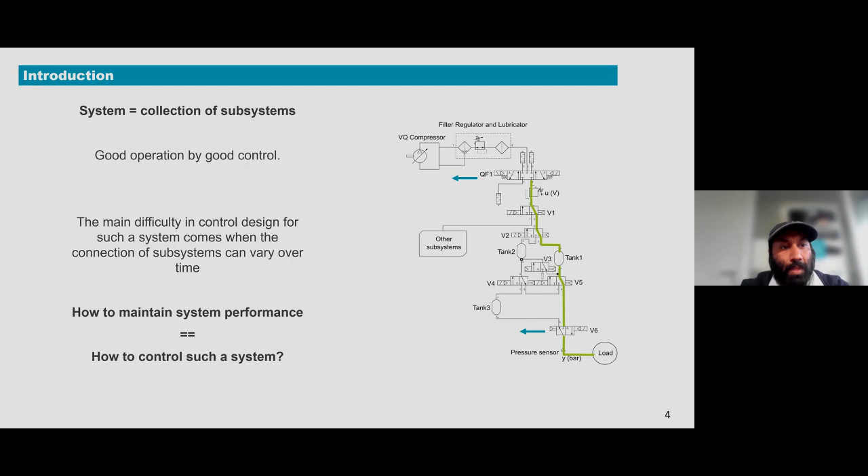I'm going to start with the introduction, or basically I'll talk about systems with variable topology. When we say system, we actually mean a collection of subsystems or subcomponents. And of course, by good control, we mean that they should operate in a good way. We'll talk about this topology in general at a later stage.

But the main difficulty in control design for such a system that consists of subsystems is when the connection of subsystems can vary over time. The main question that arises is how can we maintain the system performance even though there are changes in the connections of these subsystems, or rather how to control such a system.

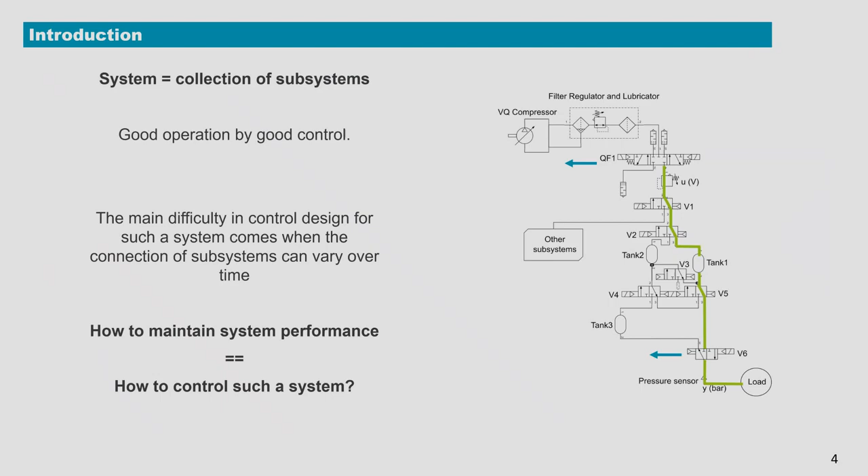So in a nutshell, where does this fit in at Flanders Make? We often work in dedicated modeling and identification for control. Some of the challenges that industry poses is how to control systems with variable topologies.

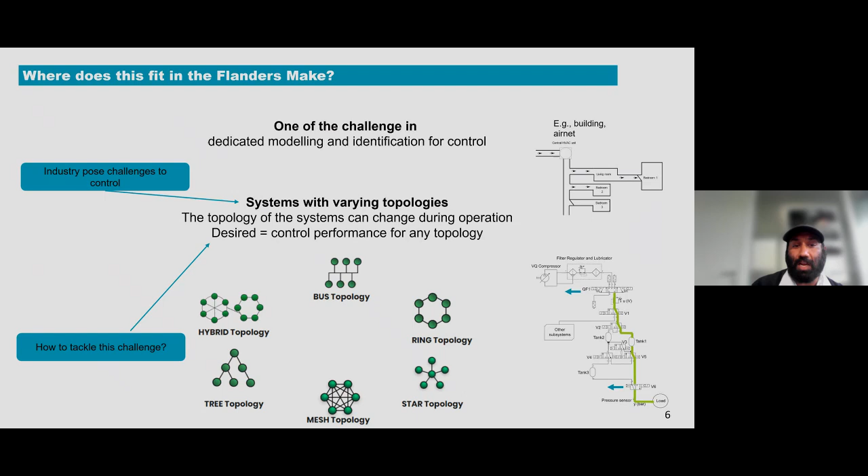You might have heard this word topology in different engineering aspects, like bus topology, which is quite common, tree topology, mesh topology, and so on. But I'll go more in detail about what we mean when we say systems with variable topology. In finalizing this, we want to show how we tackle this challenge of controlling systems with variable topologies.

Like I said, a system can consist of different subsystems, and they can form a network in such a way. There are subsystems, like you can see in this figure. There are some subsystems, they can communicate with each other, and there are many subsystems. A good operation would be if it has good control when the topology or the connections between these subsystems change.

A good example is a microgrid, where you will see that at some point there might be some houses connected, some batteries, some EV chargers connected. What you want to do is actually balance the load, and in such a way you balance the state of power and state of charge.

It might happen that most of the time these things might not be connected. So what I mean is the topology actually changes, and you would still be able to meet the supply and demand by balancing this state of power and state of charge.

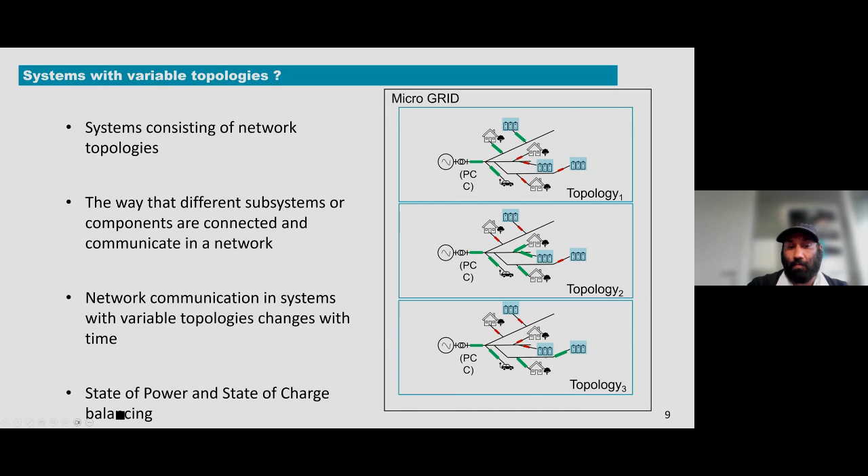Another good example is a central HVAC unit in a building. Let's say you have different rooms, like a living room and a bedroom. It might happen that you want to heat one living room or all of them. And suppose you have a door connected between two rooms, like in this third figure, it might happen that you have to open and close the door. In this way, the dynamics or heating of these rooms will change, and the main goal here is temperature balancing.

Another example is an air net, basically a pneumatic system. You have compressors, you have a filter regulator and lubricator, and then you actually have pressure and flow, basically controlling the load or meeting the demand.

It might happen that, for example, a valve V2 can change direction, and during this change in direction, you change the topology inside the system. You can see the difference between these two figures is the direction or flow of the green line. The main goal here is to control the system, or rather balance the pressure. I'll talk more about these components because this is where we actually validate our examples or validate our algorithms to control systems with variable topologies.

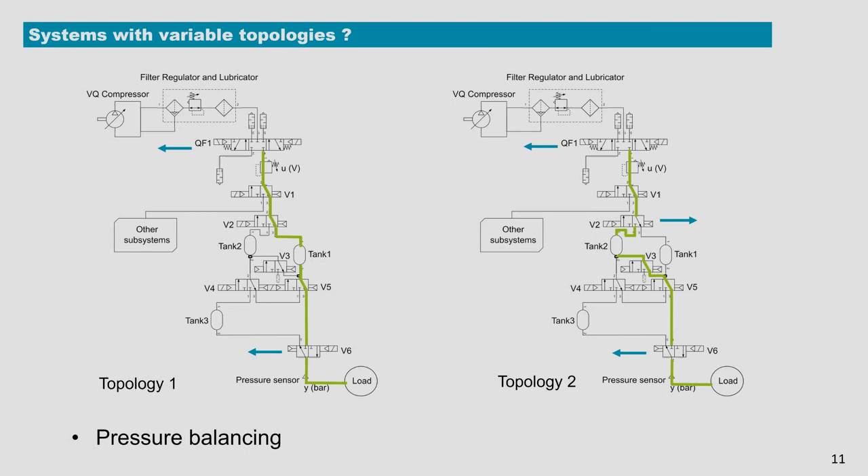So what's the main challenge here? Like I said, an example over here, just a building with central HVAC unit. Now, if the number of rooms, or rather the number of subsystems or components, increases, there will be an increase in the number of topologies and combinations, because it might be possible to just heat one room or all of these rooms, and the number of topologies increases exponentially with the number of subsystems.

So when you actually want to design a controller for this whole system, you will have an increase in the number of model identifications needed. And why is that? Because not all combinations will have the same dynamics. What I mean is heating one room will not be the same as heating all the rooms. What we actually want to do is reduce this effort. If you reduce this effort, you reduce the control design and development complexity itself. That's the main challenge we'll be trying to tackle here.

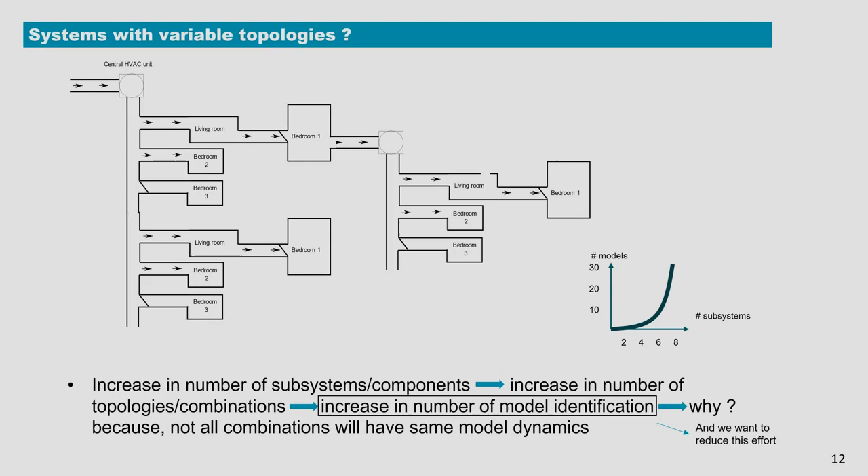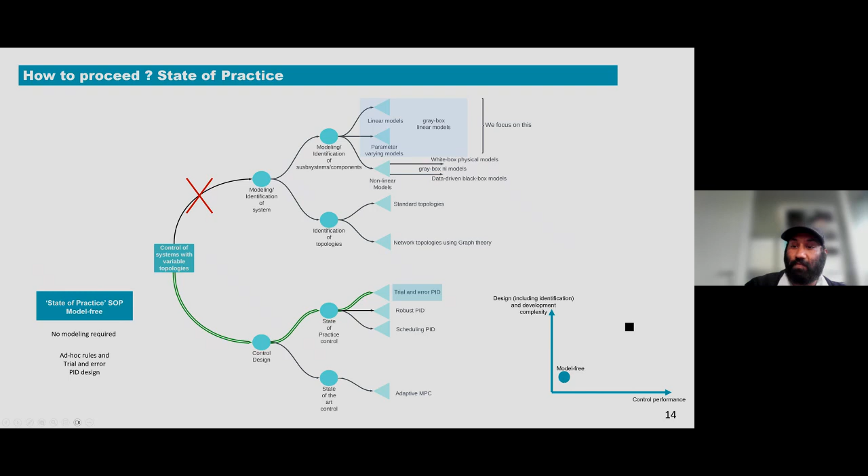So usually when we want to start controlling systems with variable topologies, we follow a general flow. The most classical way of controlling these subsystems is to go for state-of-practice controllers, which are basically model-free controllers. You don't have to model anything, just try ad hoc PID controllers designed with trial and error. Of course, you do not consider the model, so you don't have to spend much time modeling or identifying the system or subsystems. This is easier in a way that you don't have to spend much effort, but at the same time your control performance might not be good. You can argue that you can spend more time doing more trial and error, but then this blue dot will actually see diminishing returns, decreasing exponentially.

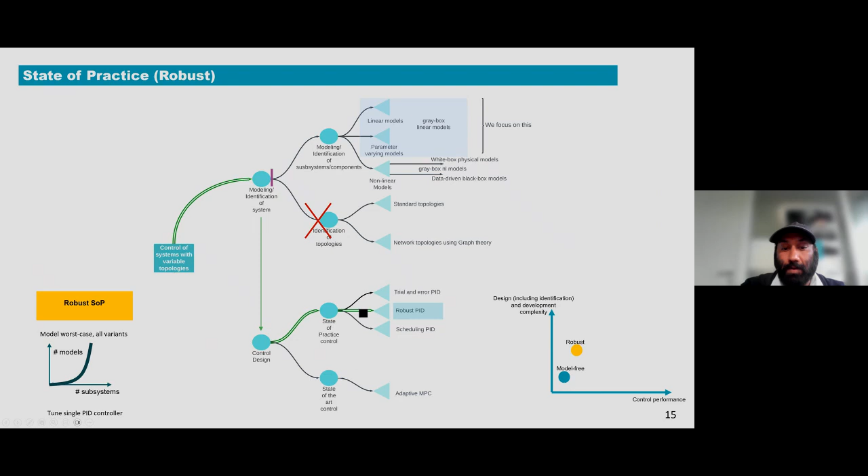One way is to actually consider the modeling part as well and try to model all combinations. So identify all the combinations, identify the dynamics of all combinations, and then start control design, but considering the worst case scenario. The drawback is you have to go through this exponential curve, performing identification procedures exponentially with respect to the number of subsystems, which increases the complexity of designing and development. But at the same time, you will see an increase in control performance because this controller will take care of, or be based on, the worst case scenario.

A good strategy would be to actually design a scheduling controller. Basically, you model all the subsystems, dynamics, or combinations, and then you design controllers for all combinations. Of course, the effort will increase even more because now you're designing the controllers as well with respect to the different subsystems or topologies. There you will see control performance increasing, but at the expense of spending a lot of effort in designing and developing the control system for variable topologies.

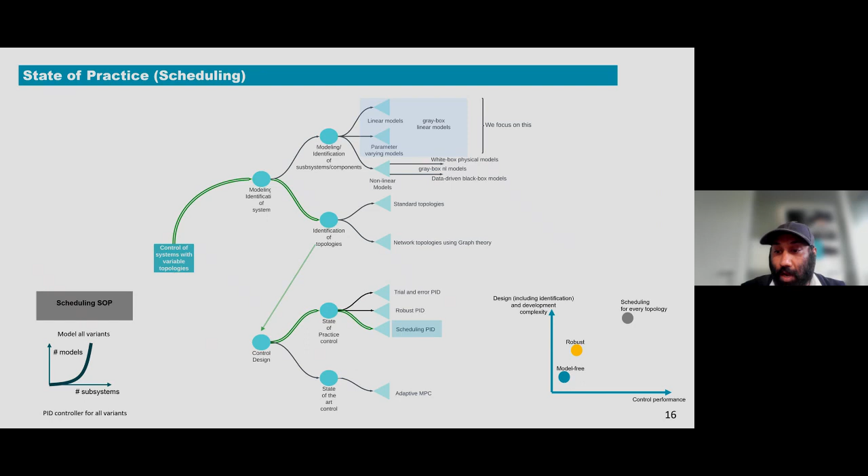So the goal is rather simple: how to get to where you don't have less performance, but a better performance, while also not having to spend a lot of time in designing and developing the controllers for the system with variable topology. Or if you want to break it down, you want to minimize the control design and development complexity and maximize the control performance. That's how we will show you here how we proceeded, or how our tools helped us achieve this.

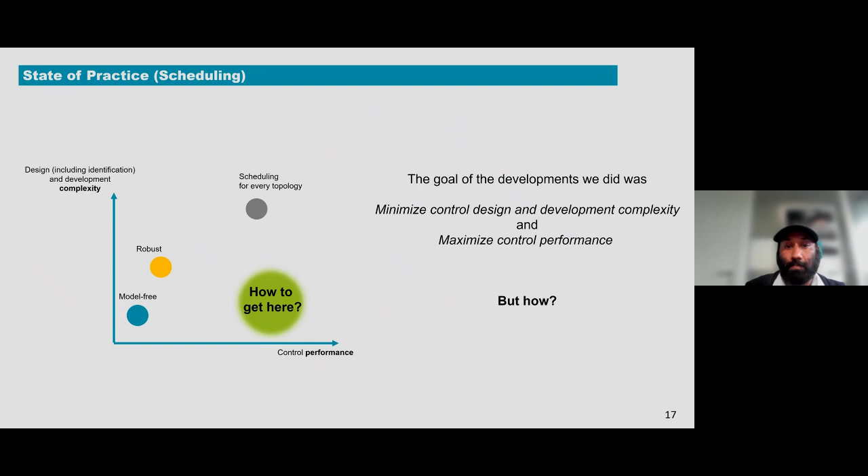For that, we went for state-of-the-art adaptive model predictive control, where what we actually do is design a model predictive controller. The key advantage is you only have to model the subsystems and not all the combinations, but you identify the topologies in such a way and make your controller adaptive to these topologies, hence the name adaptive model predictive control. Because of this linear curve, where you only have to model subsystems and not all topologies, you reduce the effort and increase control performance. This is what I'll show you by the end of this presentation.

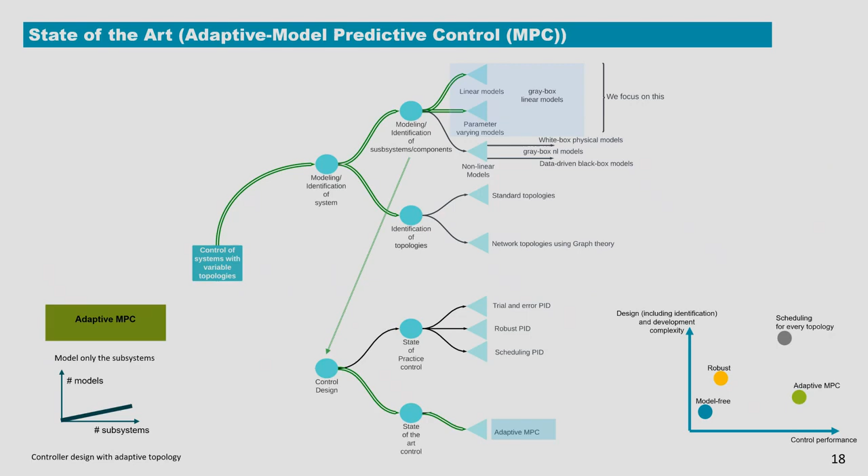This is also the key takeaway of this webinar. So we spent effort researching these topics, comparing certain approaches, and we found out that we will actually achieve this green dot over here: increasing control performance while reducing design and development complexity.

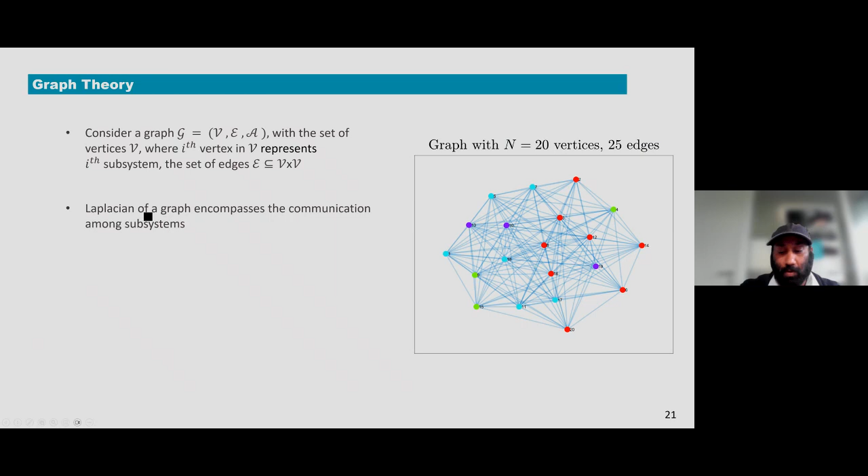I've been talking about variable topologies quite a lot, but how do we obtain these topologies? You'll remember this figure from the previous slides. If you have subsystems connected with each other, consider these subsystems as vertices and the communication as edges. You can map your whole system using graph theory. The key result is a Laplacian, which encompasses the communication among these subsystems. This is the base for our method, where you can boil down any type of network into a simple matrix known as the Laplacian.

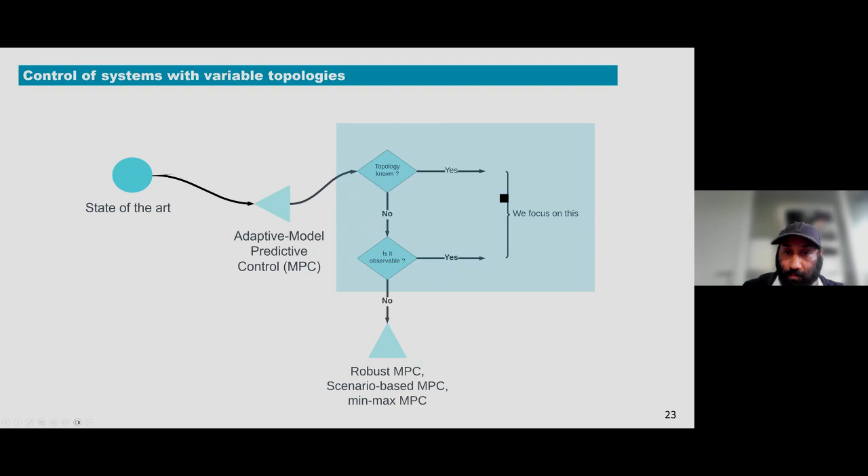So how do we control these subsystems with variable topologies? We had to make some assumptions. We assume that we know the topology. If we don't know it, we might be able to observe it on the fly. This is quite useful by monitoring, for example in a building, which door is closed or open, or in a pneumatic system, which valves are open or switched on and off. But if that's not the case, I would point you to robust MPC or scenario-based MPC. This is out of scope for our research and this webinar. We'll focus on the part where we can observe the topology on the fly, or in real time.

Methodology is rather simple. You model and identify each subsystem like I said before, so your complexity is not exponential anymore, it's just linear with the number of subsystems you model and identify. You define the topology using the Laplacian, or graph theory. Once you do that, you formulate your topology in this form and add a virtual leader - I'll come back to the reason for that. Then you formulate the model predictive control optimization problem with an adaptive Laplacian, or adaptive communication between the subsystems, representing variable topologies.

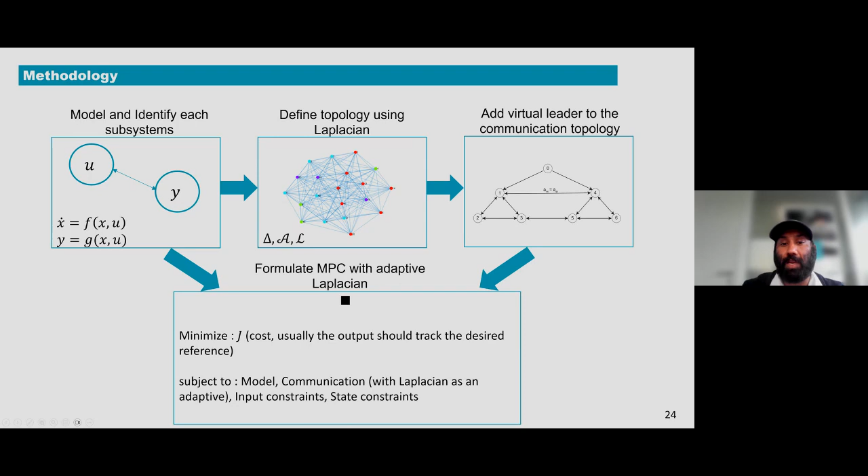So the goal of model predictive control is, at every time sample, to minimize the cost - usually the output that needs to be tracked with the desired reference - subject to the model we identified, the communication between subsystems. So the Laplacian would be an adaptive parameter which can be observed in real time, along with input and state constraints.

We have a pneumatic system in our laboratory, and we validated this methodology, this algorithm, in our pneumatic system.

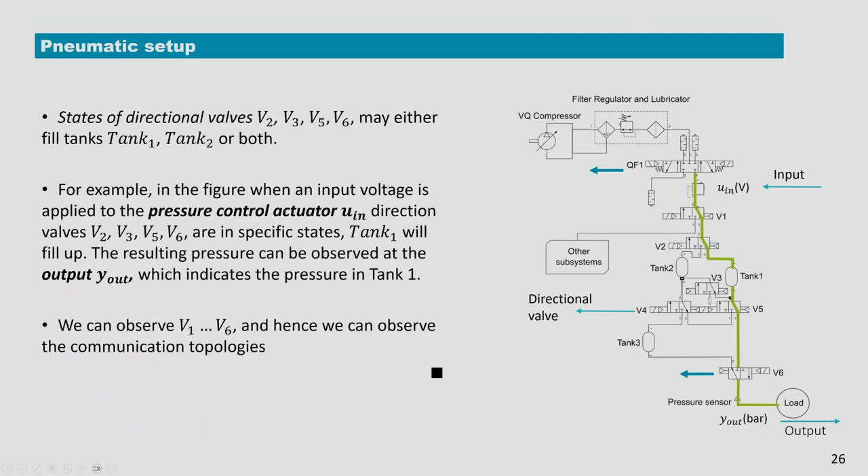In this case, we can observe the valves, and hence we can observe the communication topologies. This also fits the description.

We had to make some assumptions in modeling the pneumatic system, or the subsystems: we consider the ideal gas equation and an adiabatic process. We neglect valve dynamics, assuming they switch so fast that we don't need to account for that.

For the communication, we consider leader and follower communication with a virtual leader. The reason for choosing this virtual leader is we assume there's a delay which can occur due to the tubes in this pneumatic system. The tanks are considered the followers - basically, they are the subsystems. We consider bidirectional communication, meaning each tank can communicate with the other tank, but this can also be extended to one-way communication. The communication has a spanning tree.

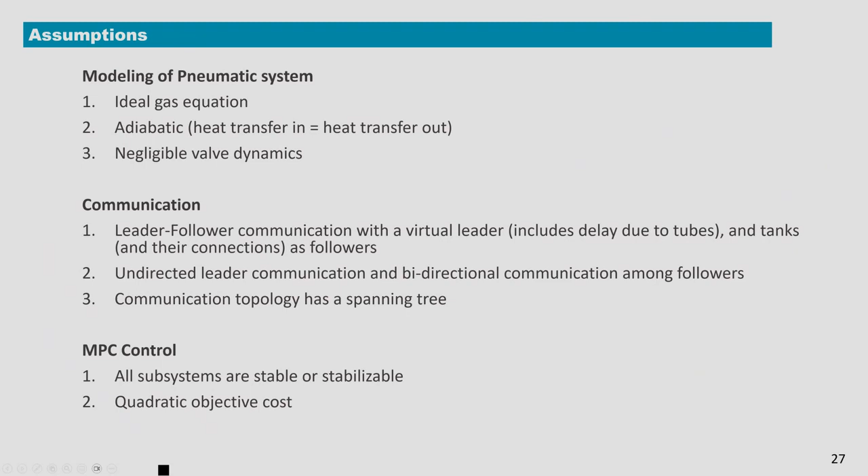For the MPC control, we have to assume that all subsystems are stable or stabilizable, because that's the cost we pay for introducing the Laplacian, or making the algorithm an adaptive MPC control. We assume we have a quadratic objective cost. What this MPC control does is solve an optimization problem at every sample time, and this sample time is usually fast, depending on the dynamics of the system.

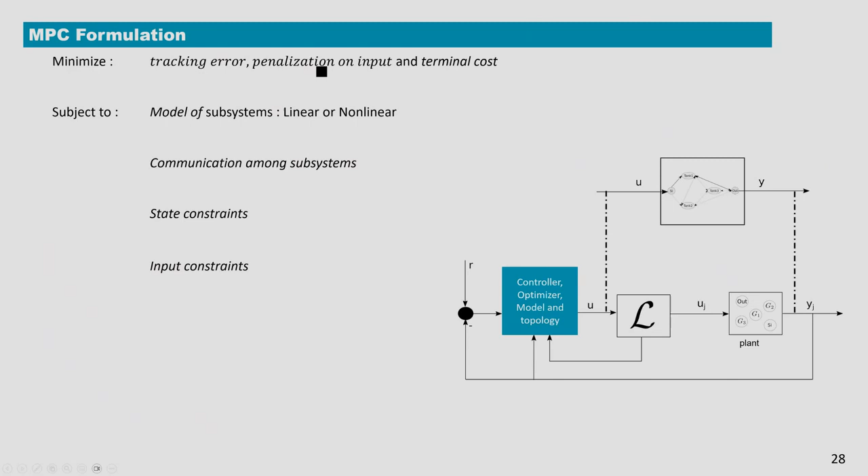So the goal here is basically you have to track a reference, or in our case, provide an output pressure to the load. We also put penalization of input and terminal cost for stability.

Subject to the model of the system, you can choose either linear or non-linear models. The communication among subsystems, using graph theory, you can obtain this big L, which is basically a Laplacian, plus state and input constraints. If you solve this optimization problem every sampling time, you will provide an optimal input that actually achieves the output, no matter how the Laplacian changes or the topology varies.

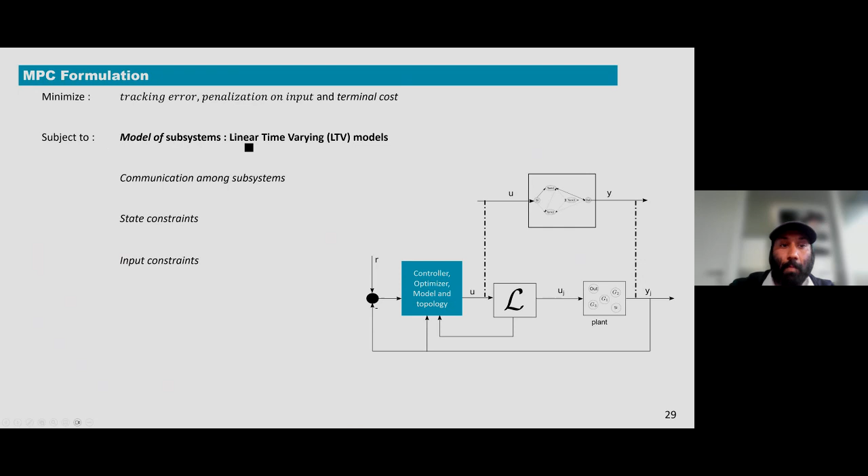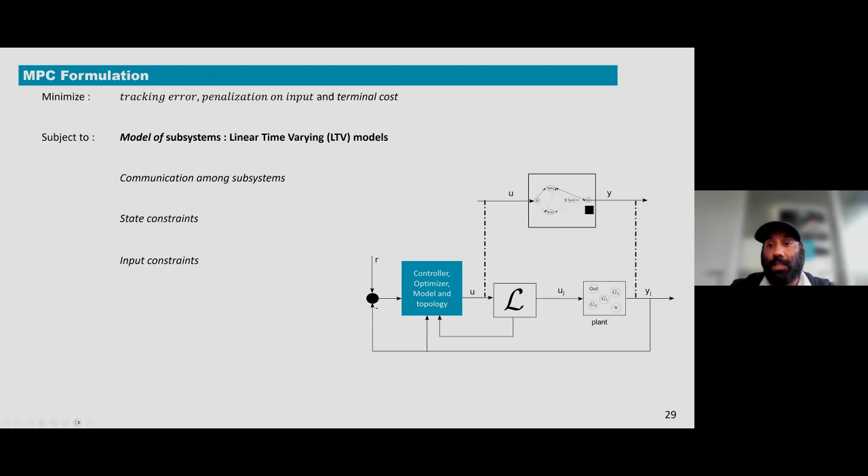For modeling the subsystem, we chose linear time varying models because, as I said, we have tanks, and emptying the tank is not the same as filling the tank. So the dynamics actually depend on the pressure as well. And this is how we moved forward.

I'm just going to go towards the results. But before that, what we did was design an MPC controller which is adaptive, because it considers the observed Laplacian. This means it takes into consideration the variable topology, or this changing communication.

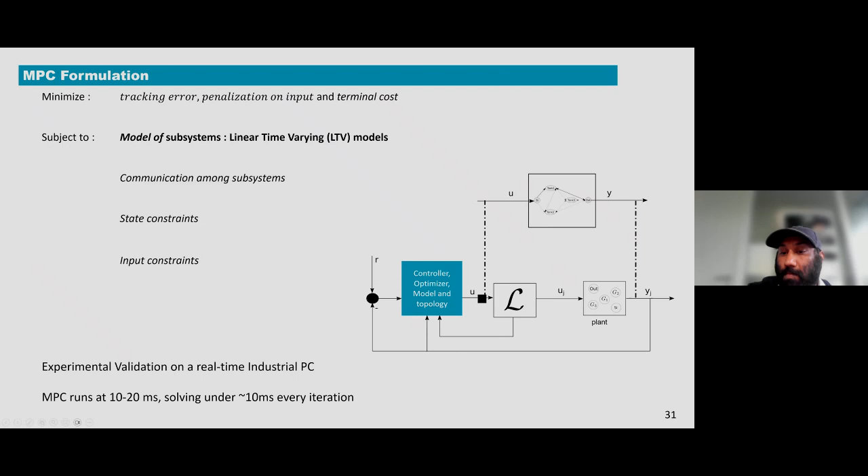We deployed this controller on a real-time industrial PC, and validated it experimentally on a pneumatic system. The optimization runs every 10 or 20 milliseconds depending on the application, and it always solves in under 10 milliseconds. This means it's updating the control input to the system based on the variable topology, and it's fast enough to provide this optimal input coming out of the optimization problem.

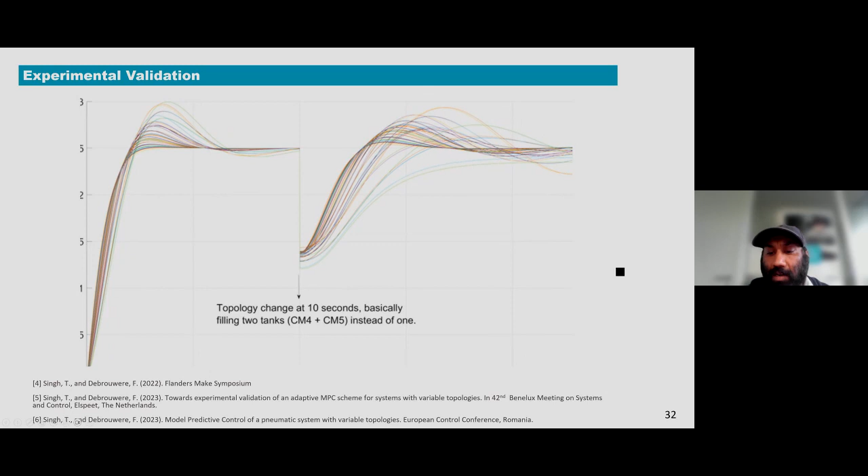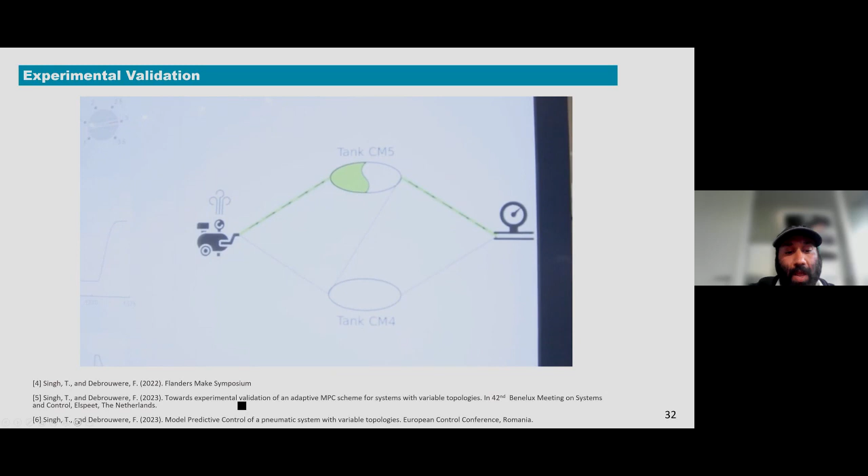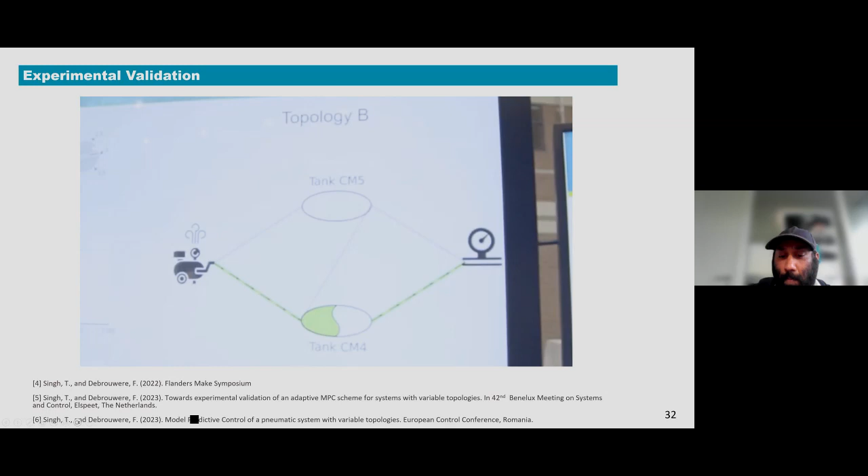So we had quite a lot of results. We did a lot of sensitivity analysis, and validated and compared it with a lot of state of practice controllers. I didn't go into much detail, it's rather high level in theory, so if you want to look into the methodology, we have two publications on this.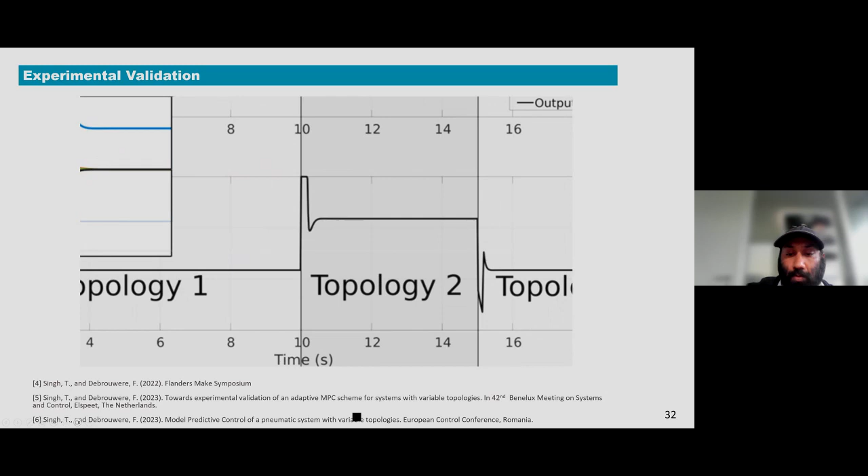Not just that, we also presented a real-time demonstration at the Flanders Make Symposium in 2022. This is basically the results coming from that, what you see is the video from the symposium.

Again, I'm not going to talk about the results in detail, just the key takeaway. We compared our algorithm, the adaptive MPC methodology, with different classical controllers: the state of practice controller, the robust controller for worst case scenario, and the scheduling controller, which switches between controllers when the topology changes.

So let's see how the adaptive MPC compared with a state of practice controller. Since it was tuned ad hoc, it didn't consider the modeling, it was a model-free control design. There was a lot of overshoot when the topology changed, and you can observe this: the ad hoc aggressive PI controller shows a bit of overshoot.

The red part is the overshoot, while the green part is the MPC controller. There was a reduction of overshoot of nearly 100%. Also, the control input, or voltage applied to the valve, had some oscillations once the topology changed, and this was also reduced in the MPC controller, shown in the green curve.

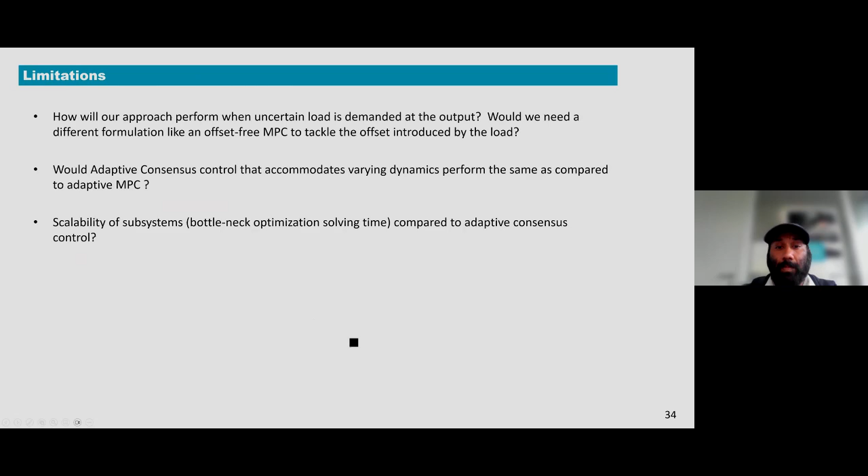That's all from my side. If you have any questions, please don't hesitate to post these questions on the Q&A chat box.

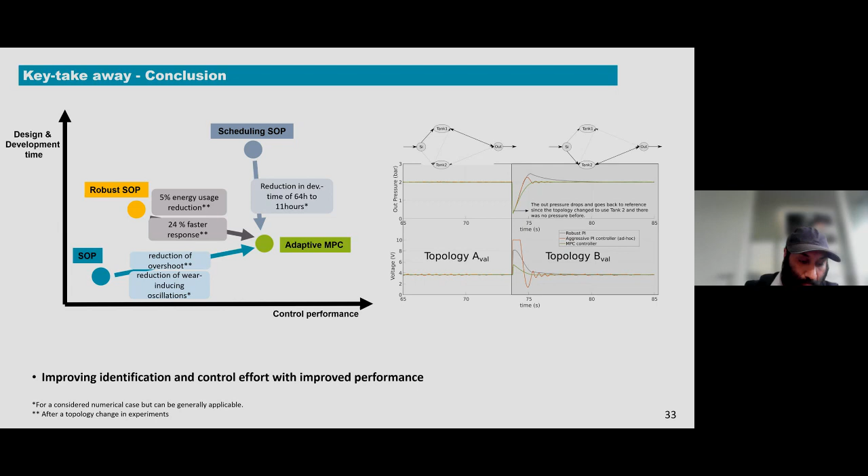Maybe while we wait, I have one question for you. We talked about it already a little bit in the presentation, but can you summarize or give a brief overview of which kind of companies with which kind of applications can benefit the most from using this kind of methodology? So I'll go back to the examples which I showed before.

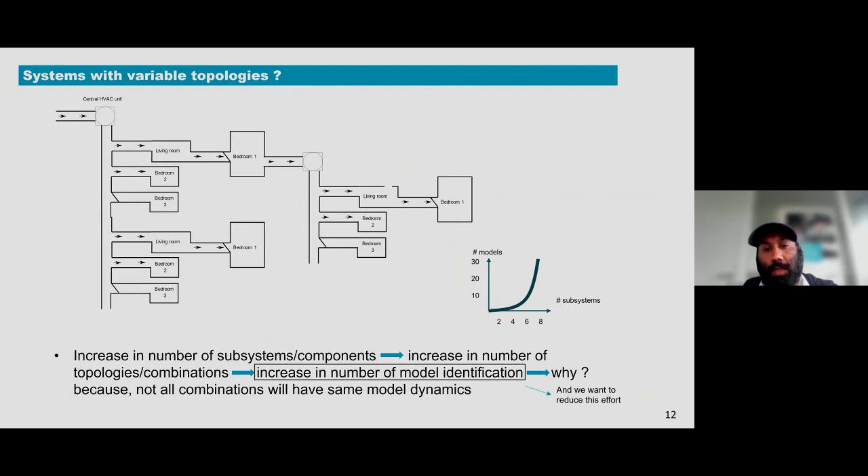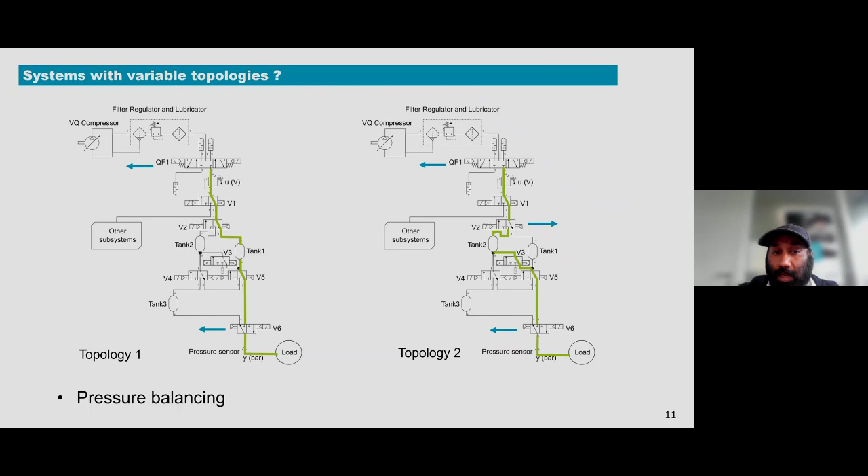So we validated this methodology in a pneumatic system, but this can be useful in AirNet, where you have different topologies coming into account. For example, we have Atlas Copco with AirNets, so this can be useful in those applications. Then we also have temperature balancing, where you have different topologies. One of the companies that has this need to tackle this problem is Duco, where they have different topologies with different combinations possible.

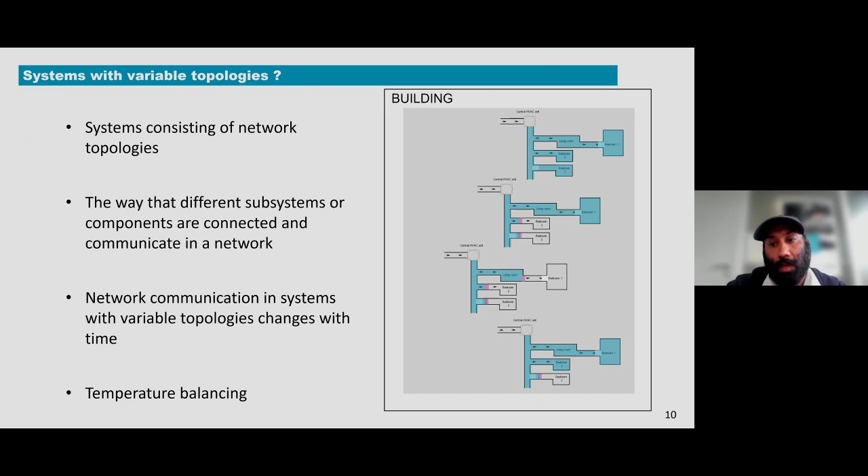Okay. And if there are people listening who might be triggered by this idea, how can they get started with this? What do they need to do, or do you have any idea for that?

So when I said where does this fit in Flanders Make, we actually look into more dedicated modeling and identification for control. So we build the tools that can be useful not just for modeling and identification, but also for control. The tools I mentioned, MPC control, give us the possibility to improve the design and development time, and actually have an adaptive control, like the controller that is able to adapt to variable topologies. So we have certain tools.

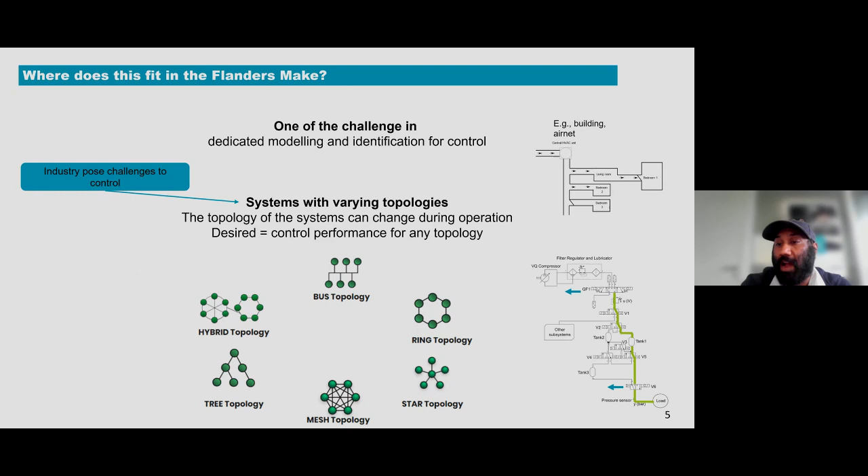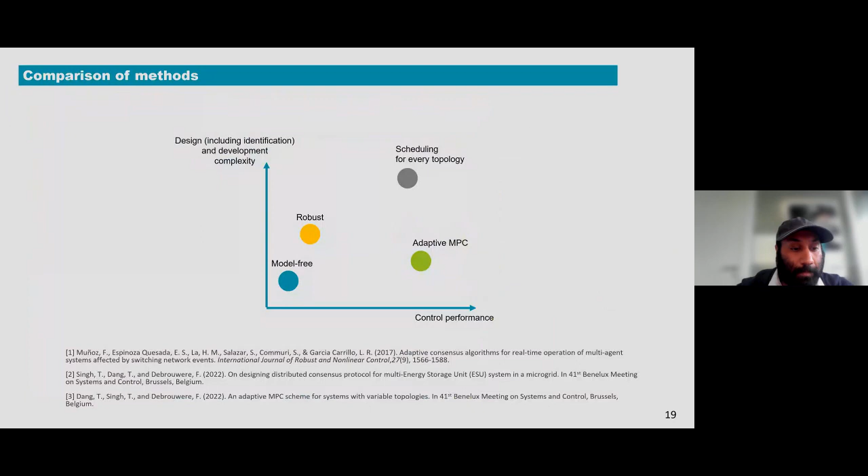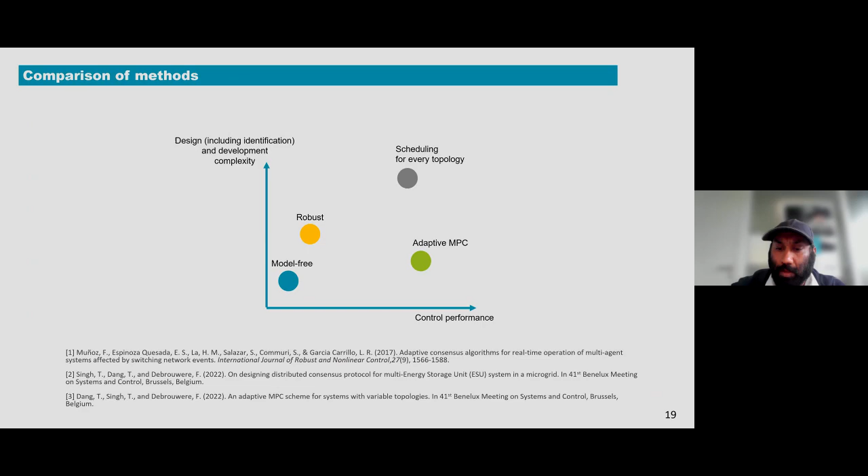If someone really wants to start looking into this, you can look into some references. If someone is interested in the classical controllers, we have certain references here. This is a recorded session, so this will be available already. We also have an overview of a publication, two publications basically. The main one was recently published in the European Control Conference. That will provide you a starting point, or a low level overview of the whole scenario I've shown here.